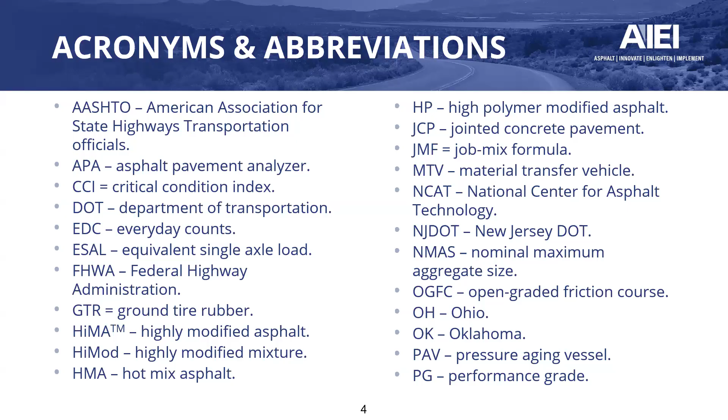We do have expected outcomes. So at the end of this webinar, we certainly hope that you'll understand how high polymer binders and mixtures are defined, specified, and used across different state DOTs. We hope you'll learn about key benefits and limitations, including cost, performance, and constructability considerations. We'll explore the results of a SWOT analysis, the strengths, weaknesses, opportunities, and threat analysis that identifies barriers to broader adoption and potential solutions. We'll review case studies highlighting how high polymer binders are being used for thin overlays, structural application, and preservation strategies. And we'll discover implementable strategies and specification requirements that agencies can adopt to ensure successful deployment.

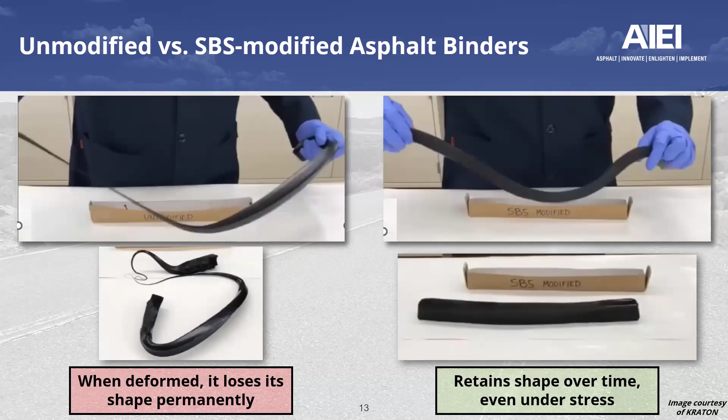Polymer modification is not new, and there's been a lot of work for over 50 years just looking at this technology and polymer modification in general.

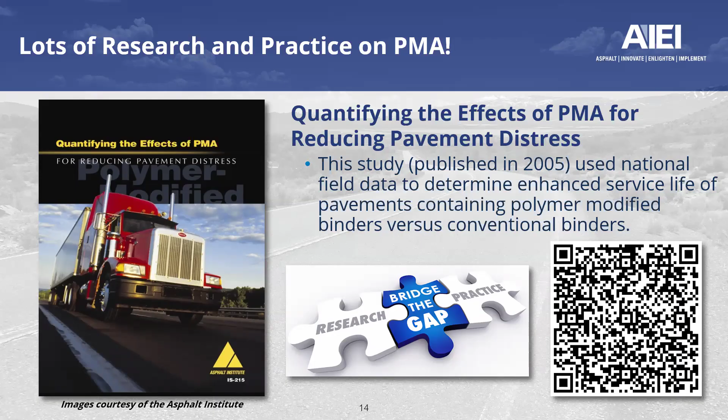I want to highlight an effort that was done by the Asphalt Institute back around 2005, entitled Quantifying the Effects of PMA for Reducing Pavement Distress. The intent was to compare the performance of neat hot mix asphalt mixtures to companion sections built with one or more layers of polymer modification. The results showed how a typical maintenance and rehabilitation schedule for unmodified pavement could be extended with the use of polymer modified asphalt, either in just the wearing course or both the wearing course and base layer. If you want to learn more about this effort, we're providing a QR code for this slide.

Also worth mentioning as part of this effort is the use of polymer modified in dense graded mixtures, and an internet survey and tools to measure return on investment. The intent of that effort was to recommend one or more tools that highway agencies can use to ensure that there will be a sufficient return on investment when using PMAs in dense graded mixtures. This was part of an effort funded by Federal Highway Administration and NAPA under cooperative agreement.

When this study was initiated back in April 2018, NAPA reported that while some states are only specifying polymer modified on highways with heavier traffic loads, other states were beginning to specify it for all dense graded mixtures. Since the latter change in specifications would usually increase initial pavement costs, it was felt that tools such as performance predictions provided by mechanistic empirical analysis, compared with life cycle cost analysis (LCCA), should be used to ensure that these increased costs will translate into better pavement performance and hence less applications of pavement preservation or rehabilitation strategy during pavement service life. The concern expressed by some industry members was that some highway agencies that have recently increased the amount of PMA being used, or were currently considering increasing it, have not used any tools to ensure that there will be sufficient return on investment.

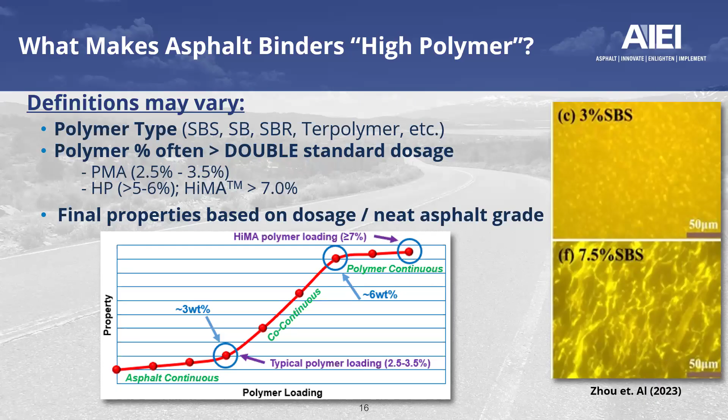All of that gets us into what we're trying to do as part of this effort. High polymer modification also is not new—it's been around for about 14, 15 years, even a little bit more. So we wanted to conduct a gap analysis on the use of this technology in binders and mixtures and try to identify critical limitations, gaps, and needs through what we call a SWOT analysis: strengths, weaknesses, opportunities, and threats. The main intention is to identify and put forth effective strategies and lessons learned by state DOTs. These are the 5 states that Tim mentioned we had the pleasure to visit with and learn from their experience. This effort also built on a previous effort completed under the Federal Highway Everyday Count Thin Overlay Pavement Solution Program, EDC6 TOPS.

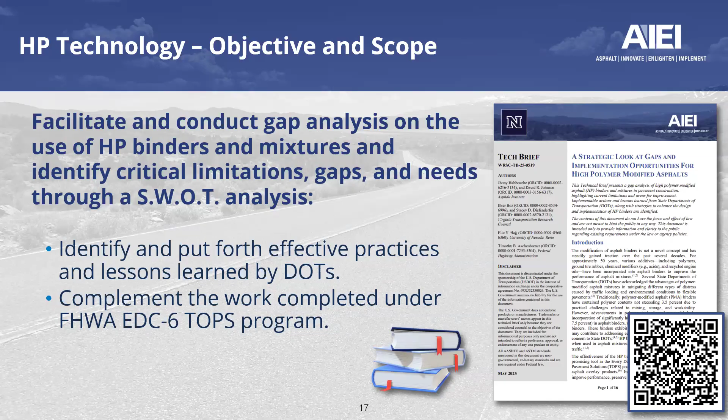High polymer modification was found to offer additional advantages in flexible pavements subjected to heavy and slow-moving traffic. When we talk about new construction, the consideration is to combat critical distresses such as fatigue cracking, rutting, shoving in asphalt, as well as top-down cracking. And in case this technology was used for rehabilitation, the consideration is to combat what we call reflective cracking.

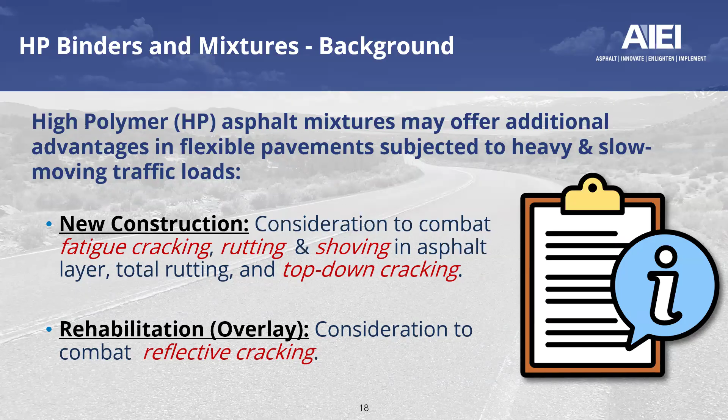Going a little bit internationally for some of the main case studies, we're starting with the Port of Napier in New Zealand in 2010. The use of HP provided a long-term solution to the frequent rutting issue they had at the port facility. This was paved in 2010, and it delivered an exceptional rutting performance, especially for heavy load traffic versus other alternative solutions that were considered.

Another great example was at the test track for the National Center for Asphalt Technology, the NCAT test track located in Auburn, Alabama. That was one of the first sections built in the United States, back in 2009. A recommendation is to use an AASHTO structural layer coefficient 70% higher when using a certain technology under the high polymer umbrella. The section was subjected to multiple cycles of traffic, and it provided an excellent performance.

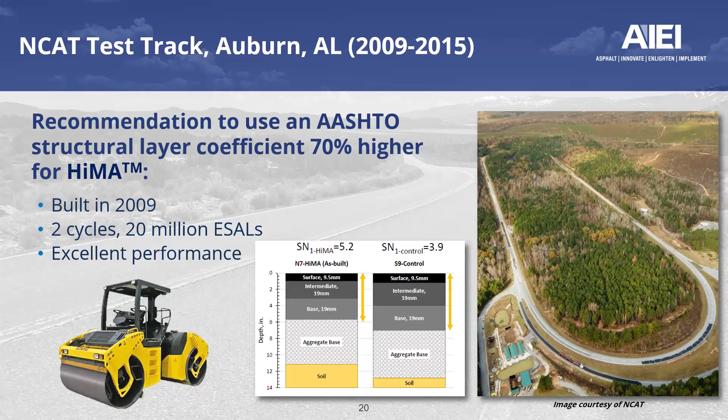If we take a look at the pavement structure here, we see that a 7-inch structure was equivalent to about a 5 3/4 inch of HP mixtures. This did not stop here. Other state DOTs expressed interest in trying to compute structural layer coefficient and do a structural assessment for their pavement when HP technology is used.

For example, Florida DOT recommendation was to use a 0.54 structural layer coefficient compared to a typical 0.44 for PMA. This was developed based on performance properties of the binder and the mixtures, using mechanistic empirical simulations and analysis, taking into consideration several critical distresses such as bottom fatigue cracking, rutting, shoving, and reflective cracking.

Also, the NCAT test track has a lot of follow-up studies and analysis between 2010 and 2015, on top of the 2009 work. They recommended structural layer coefficients up to 0.75 and 0.92 when HP mixtures are being used, compared to the 0.44 and 0.54 conventional values used for PMA, respectively. All of that was determined based on in situ strain measurements and a lot of lab fatigue performance.

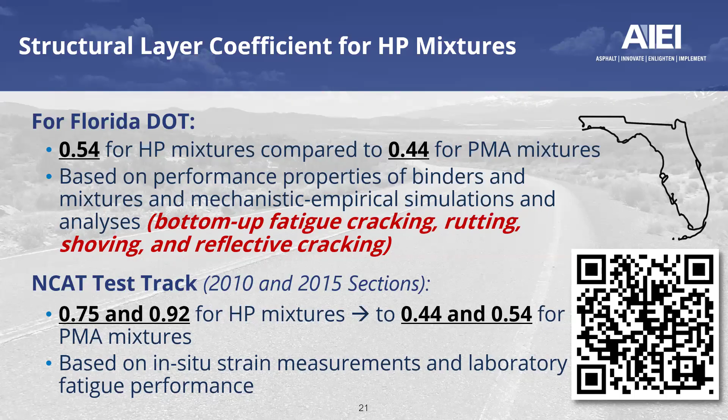Staying as well in the field, we go to New York City 1st Street in 2012. We had a high polymer thin overlay that was built over existing concrete, and it saved about 80% in cost versus removing and replacing. There is a photo that was taken and published in the TRNews in 2019, and that shows a great performance of the section.

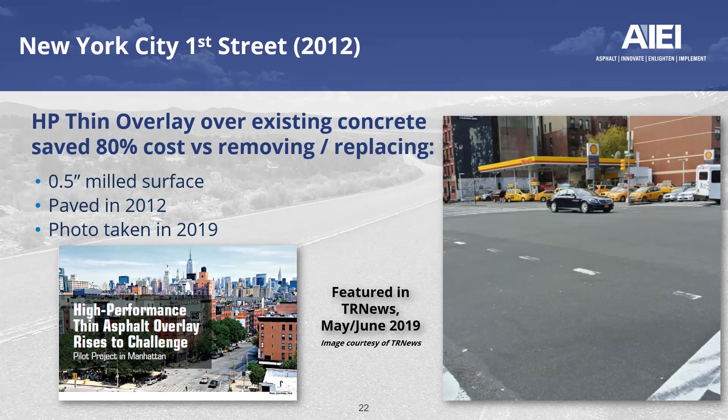Another interesting project goes into Oklahoma on the I-40 in 2012, and the use of such technology eliminated the rutting issue, and it was awarded as a perpetual pavement by conversion. Later on, as part of this presentation, we'll talk about the rich intermediate layer, the RIL, which is a type of mixture being used by Oklahoma DOT with an HP binder. That section was paved in 2012, and it shows an international roughness index of 50 even after 10 plus years.

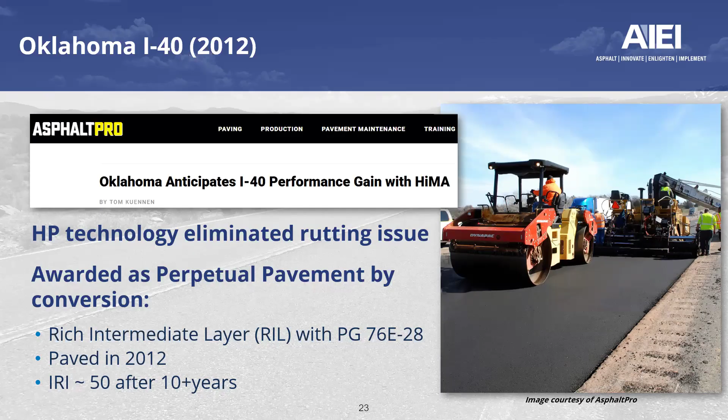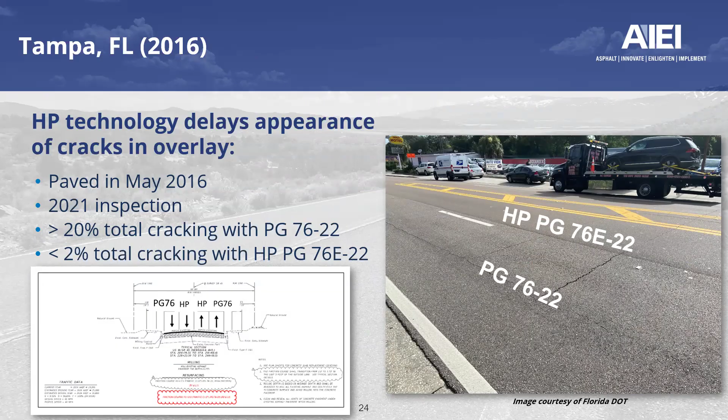Going down southeast to Tampa, Florida in 2016, the HP technology delays appearance of cracks in an overlay. It was paved in May 2016. After 2021 inspection, it was shown that there is over 20% total cracking with the conventional PMA in that lane, versus less than 2% total cracking with the lane that employed high polymer modified mixtures.

Going up to Alaska, HP offered a solution for studded tire damage. The typical binder used in that state when it's labeled HP is a PG64E-40, and it reduced rutting by almost half compared to previous alternative binders.

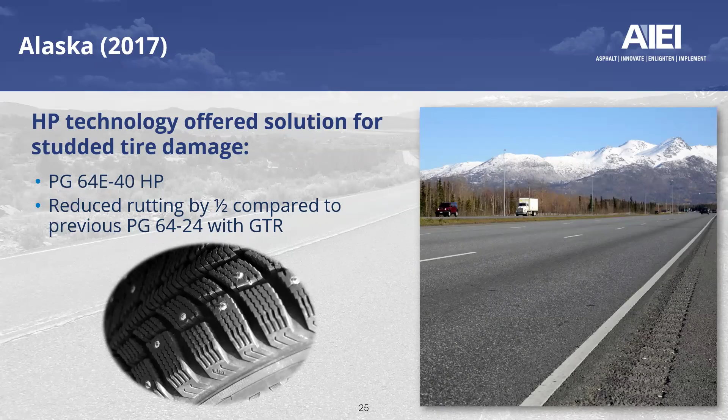Also, the use of HP was even analyzed for Florida DOT into their open graded friction course, an effort completed by the Texas Transportation Institute, TTI. It showed that the use of HP in open graded friction course can even enhance the performance of that technology by about 7 to 8 years in terms of performance life or service life. And a lot more examples are available.

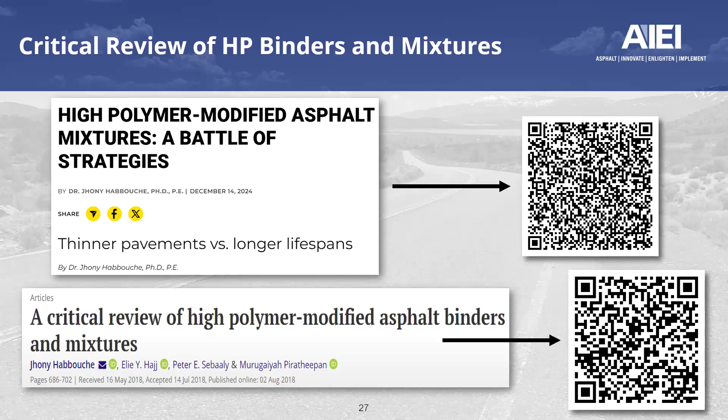If you're interested, the upper QR code will take you to a more practical, practice-oriented article summarizing these technologies and the various strategies to structurally assess them. If you're interested in learning about lab and field insight over the last 10 to 12 years, the lower QR code will take you to a great article with a critical review of such technology.

Talking about the state of the practice, back in 2021 a project was initiated to look at the state of practice of using such technology in the United States. We had about 20 states with some experience with high polymer, with the major focus more towards the eastern side of the US, primarily in the Northeast. A QR code is provided to the document with insights on how the survey was conducted and how the collected data was analyzed.

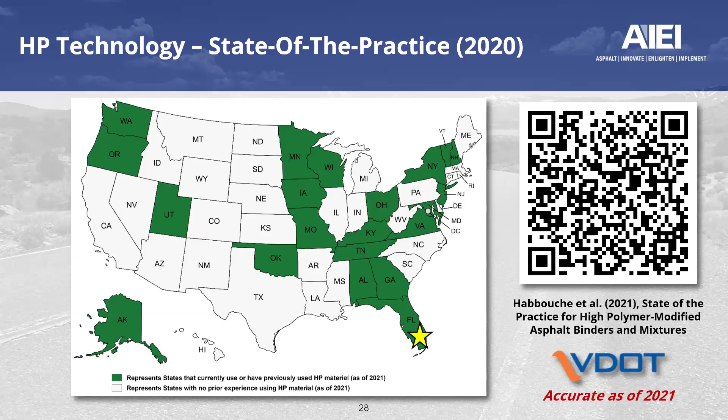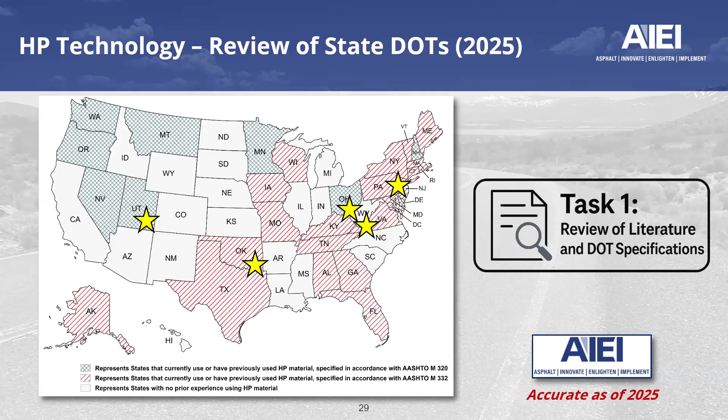Taking a brief look at the type of specification, these are from the 5 states we visited. I want to talk first about the last one, Virginia. Virginia follows M332, with a PG76E-22. They have a requirement for testing the MSCR: the non-recoverable compliance at 3.2 kPa is a maximum of 0.1 kPa⁻¹, and they have a requirement on percent recovery of a minimum 90% at 76 degrees C.

For another example, Utah uses AASHTO M320 with PG76-34. They only have a requirement on percent recovery of a minimum 90%. They do have a requirement on their Delta Tc, but as we'll notice throughout the case study, they also have requirements on the mixture, not only the binder. So the definition and acceptance of HP is not related to SBS polymer content, but is more of a performance-oriented viewpoint, related to specific binder rheology parameters and characteristics.

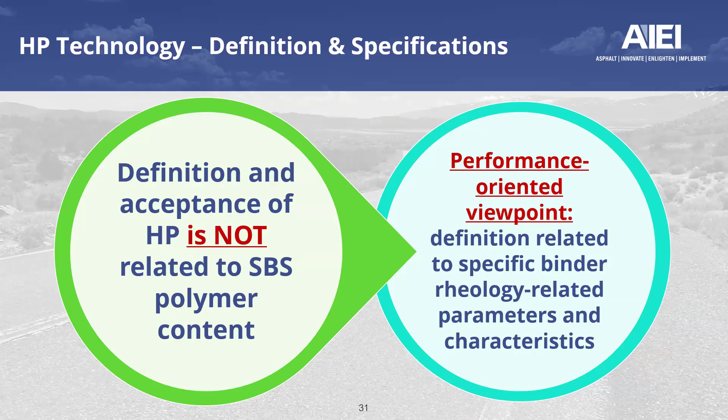Next, the second task was to develop an information gathering document. We developed about 30 questions broken into 9 modules, covering practice, usage, specification, mixture, pavement design, environmental restrictions, research, demo projects, costs, tonnage, benefits, implementation plan, and additional information. The personnel of these state DOTs were very generous with the information they provided, and were key contributors to the success of this effort.

So what we're going to do next is go through insights from these 5 virtual visits, starting with New Jersey, and then I'll hand it to my co-presenter, Dave Johnson.

All right, thank you so much, Johnny. I see that we have folks continuing to roll in. It's great to see so many people expressing interest in this.

So as Johnny rightly said, we're going to hit New Jersey first. We're going to spend a little time on these first few states, and then I'm going to make my way to Utah, no pun intended, and give more detail on that particular state, at which time I'll turn it back over to Johnny to hit Virginia and lead us through the rest of our webinar today. So New Jersey has a long history of utilizing highly modified materials.

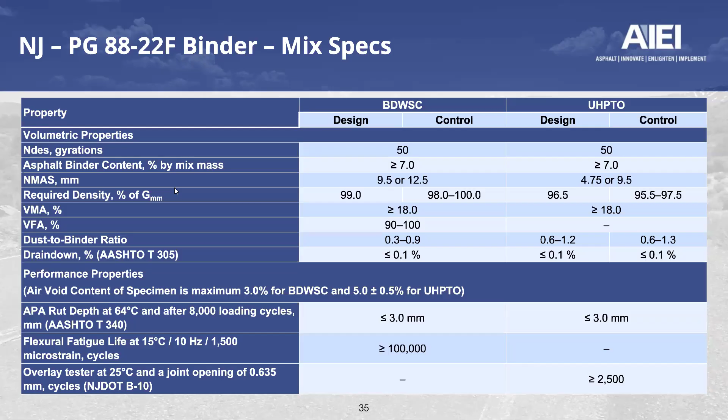So that is it for New Jersey. Let's move on to Ohio, where they as well are using these highly modified materials for bridge decks, but also at some key intersections and high stress areas.

The binder that they use is a PG 88 minus 22 modified. It's going to be pre-blended with modification, but there are no requirements placed upon their suppliers as to what kind of polymer nor a particular polymer loading. They are utilizing the PG AASHTO M320 with an elastic recovery of at least 90%. They have a separation requirement of no more than 10%, and the rotational viscosity has a relatively high, compared to most PG binders, allowance of no more than 10 Pascal seconds.

In terms of cost considerations, the size of the project certainly comes into play historically in the state of Ohio as to how much of a premium. In the case of their larger projects, it's a smaller premium of 7 to 10%. On their smaller projects, it is, as expected, a higher premium of 10 to 20%. Lots of things are coming into play as to influence that cost. The plant setup, the tonnage, and the project type are three that they noted of particular interest.

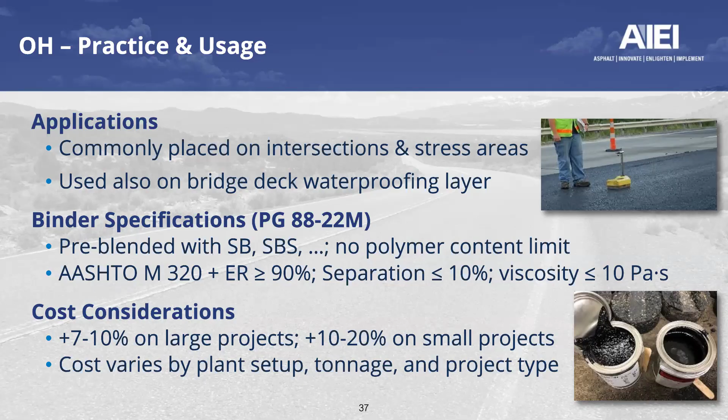Looking at the usage history, we can see that they have over a decade of usage beginning back in 2014. Fairly low tonnage for a number of years until there was a notable uptick in 2017. And as you can see, there were 10 projects, 7 bridges. 2 of the 10 projects had what they considered significant tonnage. And we, again, saw that total of over 100,000 tons.

The only other year that 100,000 tons were exceeded were just a couple of years ago in 2023. But notice that there were only 4 projects, which included only 1 bridge deck. So the tonnage totals in 17 and 23 were somewhat similar, but the number of projects to produce that tonnage were notably different, and the distribution of those types of projects was also seen to have been different.

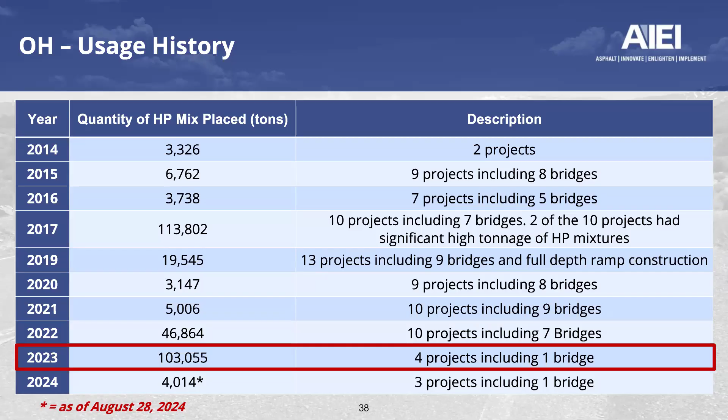In terms of the job mix criteria in Ohio, they also have a minimum binder content, also very high, in their case of 7.25%. Gyrations are at design at 50, with an Nmax of 75. The design air voids is 1.5%. The VMA on their mixes is 15.5.

They do have a permeability requirement, which in bridge decks is very common — we want to have that low permeability. Rutting is a maximum of 4 millimeters, and we can see that they are also using the APA, with requirements at 64 degrees C.

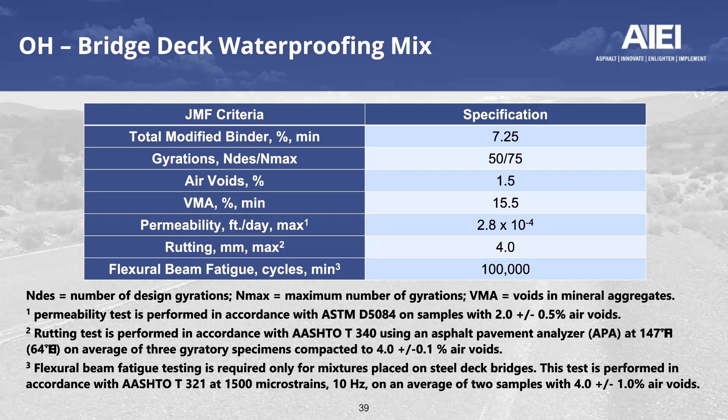They also have a flexural beam requirement, which is identical to what we saw in New Jersey: 100,000 cycles at 1,500 microstrains, with the specimens designed and built to 4% plus or minus 1% air voids. There is research going on in the state of Ohio

that looked at how much of a performance boost we see with these mixtures compared to other options, the conventional binders. They found it was about a 25% increase in life. So about 25% over their normal of 12 years would mean they're getting about 15 years or more out of these sections.

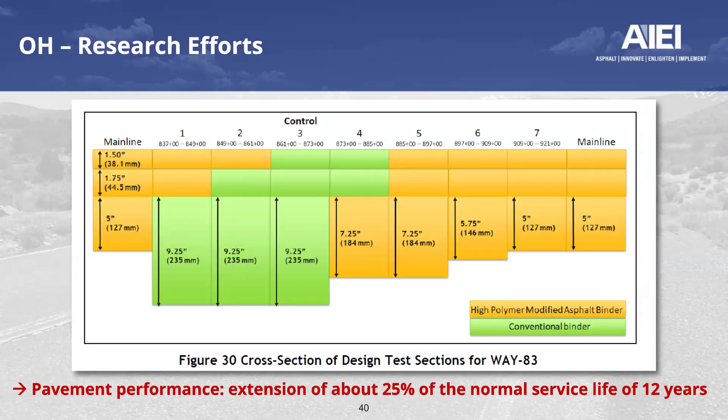Moving on to yet another O state, this time Oklahoma, where they are using these, as Johnny already mentioned, commonly as a rich intermediate layer in very high strain environments. What they are looking to address is reflective cracking.

They believe that the solution they're finding success with is this very rich, fine mixture designed to low air voids with a high binder content. They find that this is a lower cost than a thick structural layer or the utilization of geotextiles plus a leveling course.

But the cost increase is a little bit more than what we saw elsewhere — in this case, about a 21 to 31% cost increase. So they are definitely paying a premium for them, but the return on investment is being seen in the performance.

In terms of mix design, again a 50 gyration mixture, keeping the binder content not quite as high — they have a minimum of 5.5% on their 9.5 millimeter mixes. They are designing to a 3% air void at percentage of GMM. Their VMA is 15.5, as we saw in Ohio as well. VFA is 73 to 79.

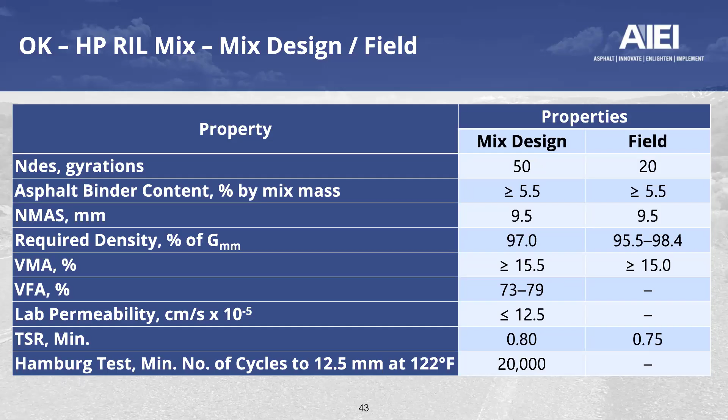It's interesting — they also are doing a TSR. This is the first state we've seen that is looking at that, and they have an 80% requirement. They, as well as others, are utilizing the Hamburg, using their standard 50 degrees C, 122 Fahrenheit, and a minimum of 20,000 cycles, with 12.5 millimeters of rut.

The cost increase is strictly in cost dollars per ton. Recognize that they are looking at their mixtures from a unit cost. Some of our states pay for binders separately; some pay for the mix as a unit of aggregate as well as binder, which is consistent with what Oklahoma is doing.

And we've noticed there was a trending upward in terms of cost, with a peak of the values available to us in 2022 of a little over $165 a ton. There was a reduction of almost $9 a ton seen in 2023. But notice that the approximate difference in price has continued to climb for most years, with a most recent premium of about $30 per ton above their conventional polymer modified mixes.

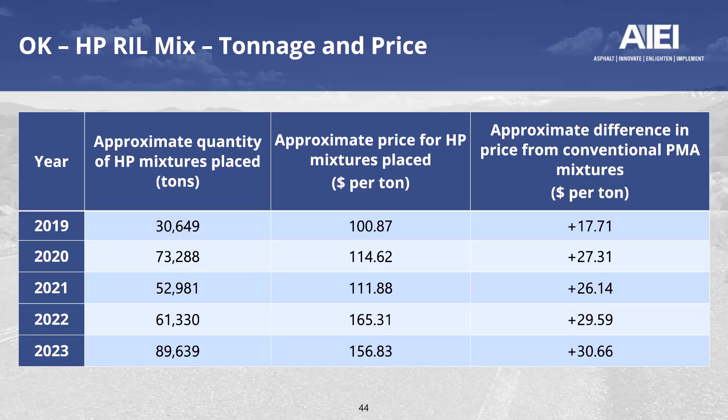We're going to spend a significantly greater amount of time in Utah. Utah has really pioneered a unique mixture that is gaining a lot of attention both stateside and internationally. The work done there — Mr. Howard Anderson, who was recently promoted to statewide materials engineer, is the individual who deserves significant credit for this, as well as others on his team, and the industry. There's a very good synergy between the contracting community and the DOT in Utah, in no small part because of the relationship that the Utah Asphalt Pavement Association helps to foster.

Utah is a Hamburg state. They were one of the lead states way back when the Hamburg was first introduced in the United States, and they continue to utilize it. They did a lot of their investigative work at the laboratory with the Hamburg device, making samples of various asphalt contents, typical Superpave mixes designed to a typical 4% air void value.

They were running the Hamburg test initially at their standard temperature of 50 degrees C for 20,000 passes, then would increase the load on each of the wheels and run an additional 20,000 passes. After a full 40,000 passes, they would allow no more than 10 millimeters of rutting, which is their standard maximum for mixtures at 20,000 passes, 50 degrees C, and standard loading weights.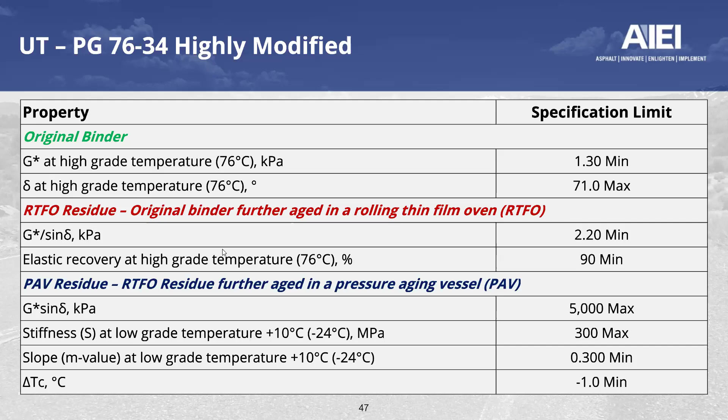Howard is always doing a great job of trying to provide a visual for folks of what exactly some of these engineering parameters might relate to. In terms of what is a kilopascal, he went through the calculations and found that approximately 11 dimes equals approximately 1 kilopascal. So he had the folks in his lab create some cups.

You can see that they were placed at room temperature, which is consistently somewhere around 72 to 74 degrees Fahrenheit. Over time, in fact over 14 days, they simply let that material set. They did time-lapse photography. We can see the initial photograph on the left and the final photograph after nearly 14 days on the right. Notice the differences between these materials.

When we look at the far left material, that is a neat asphalt, a 58-28. We have progressively higher polymer loadings for the 64-34, the 70-28, and finally the highest polymer loading in the 76-34. Notice that after 14 days, the evidence of the dimes is at best minimal. You may be able to look real close and find a dimple on the surface of that 58-28, but essentially it swallowed it up.

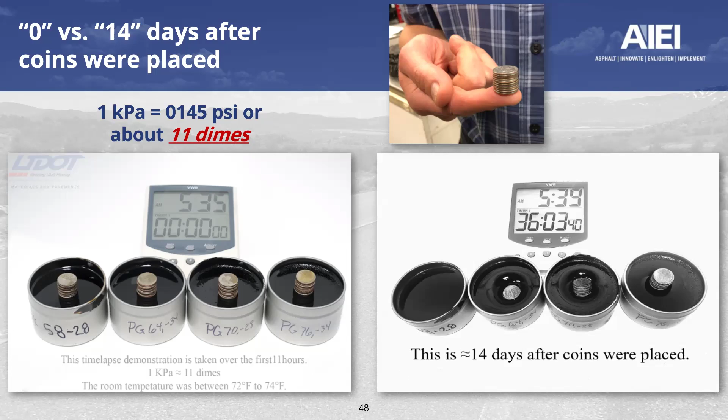The typical polymer loadings, both of these are about a 3.5% or so polymer loading. We can see that the dimes over time, 14 days once more at room temperature, slowly made their way in, but they're still visible. Very impressively, the 76-34 after 14 days, while it has deformed slightly, it is very minimal by comparison.

So armed with all of this information, Howard was able to get approval with the higher ups at the Utah DOT to establish a field trial. The regional materials engineer for Region 2 in the state of Utah was entrusted with the selection of the location, and he picked what he deemed to be the most challenging location within Region 2.

For those who aren't familiar with the state of Utah and their regions, think of the Salt Lake City area and move east and west across the state, and that is Region 2. If you move across to the west, you'll find the port of entry on the Nevada border at Wendover on Interstate 80.

While the average daily traffic at that location isn't exceptionally high, a little under 8,000 vehicles per day, it is a very major truck route with over half of the traffic stream actually being heavy commercial vehicles. When you equate that to equivalent single axle loads, you'll find that it's north of 2 million per year.

This is a very warm location within the state. If you were to run the typical software at a 98% reliability, you would see that a PG 64 minus 28 would be the recommendation from that software. So in the case of the 7634, we're stretching the boundary on both the upper and the lower end.

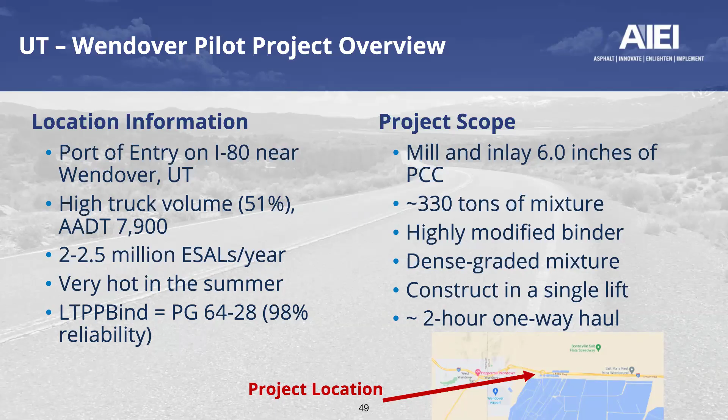Utah's mix design requirements now incorporate both a 12.5 and a 9.5, the half-inch and the 3/8 mixes. They are also designing to 50 gyrations. The target air void is plus or minus a quarter, surrounded by that 1%, so 3/4 to 1.25% is the range that they allow. The VMA, dependent upon whether it's a half or a 3/8 mix, have high values as well. What's very noteworthy is the voids filled with asphalt are high, in the low 90s.

The dust range, as we can see, is a fairly typical range. And despite the fact that they were once running 40,000 cycles at higher weight, they then shifted to 40,000 cycles: 20,000 cycles at the standard weight with 50 degrees C and an additional 20,000 with the bath temperature increased to 54. Again, at the standard weight, that 10 millimeter max requirement.

Because of the results they've seen thus far, the decision was made about 2 years ago to only do 20,000 cycles at the higher temperature of 54 degrees, maintaining that maximum of 10 millimeters. To date, whether it was 40,000 or 20,000, there has not been a mix that has had a problem.

Much like we saw in the state of New Jersey, Utah also requires a drain down test on this dense graded mix. Again, that is to ensure that with this rich mix, we don't have an experience of bleeding at those higher temperatures and during production. Thus far, we haven't had an issue with any of the mixtures in Utah with that parameter.

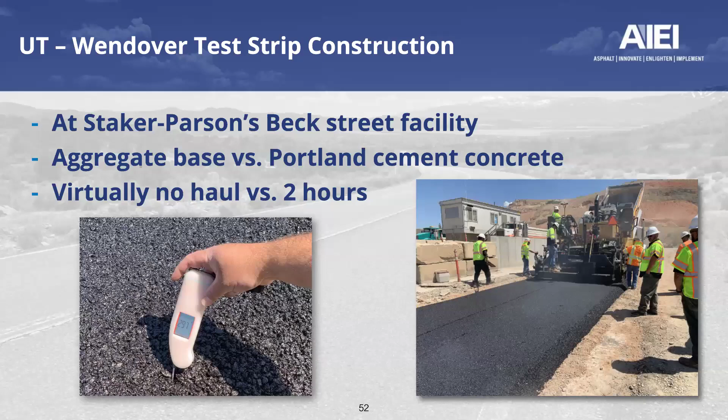The conduction of that test strip went without a hitch in terms of getting density. They did run into some issues of feeding. As you may suspect, the amount of tonnage you need to provide to the paver when laying a 12-foot wide mix going down at 7.5 inches uncompacted is very noteworthy.

So if you are considering doing thick lift paving, much like Utah is doing in this case, or the state of South Carolina and some others have done, you need to have your trucking on its A game. The problems that, as we'll see at Wendover, can arise if you have a hiccup in that trucking can be notable. So they recognized that they needed to make sure that when they went out to Wendover the next day, the trucking was on its A game.

What did we see at this test strip? Well, first and foremost, the target density in Utah is 96%. They were getting densities of 97+%, using regular rolling equipment. They did notice, as we saw in that one picture, that feeding material was a challenge to get enough material on site, even though in this case it was a zero haul situation. They definitely created a great plan for that next day.

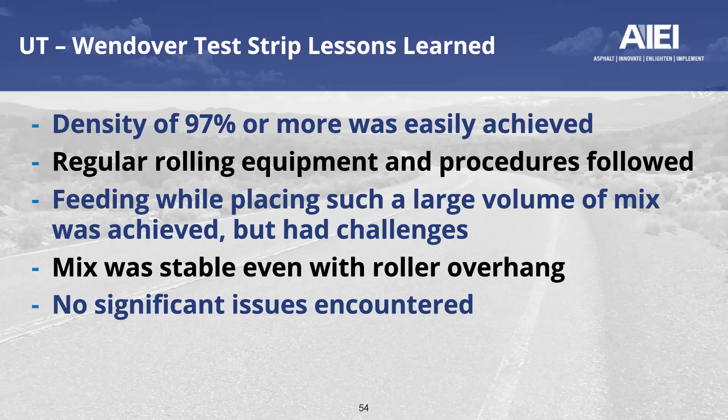What was most surprising to me about this test strip was the fact that you had unsupported edges. It was laid down at 7.5 inches loose, compacted down to 6. I truly expected this material to walk out some under the rollers, and it virtually did not. There was incredible stability with a double drum vibratory roller hanging over the edge about 4 to 6 inches, without that material showing any sloughing, even under vibration. So no significant issues were encountered in terms of densification.

So we go out to Wendover that next day. This is a shot taken from a catwalk at the interstate between the way stations on either side of the highway, in the east and west direction. In this case, we are actually looking to the west into the state of Nevada.

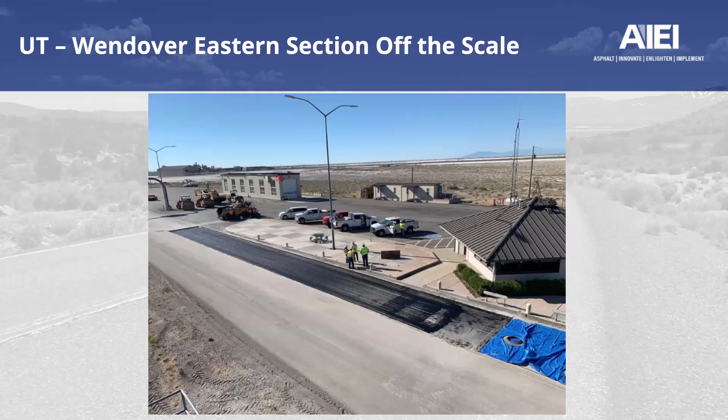You can see that they placed a tack coat. I won't bother to criticize that tack coat any more than what I just did there. This is looking east of the scale. And here's a couple of pictures from construction.

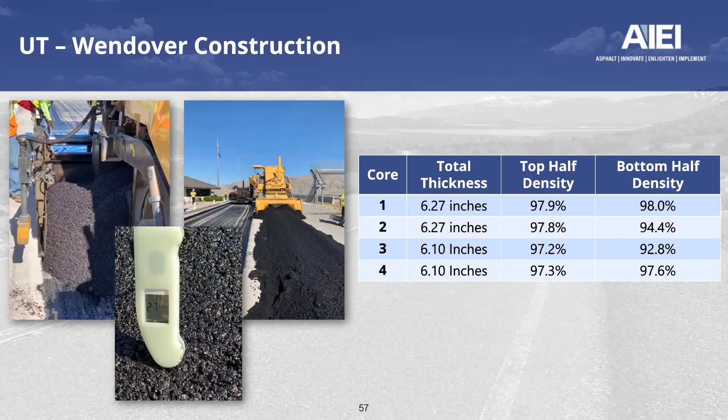What have we seen in terms of performance? We continue to call this early performance, but in June we will hit the 5-year mark. Successful construction, even with that 2-hour one-way haul, was achieved. The densities—the DOT was holding the contractor to their PWL spec only on the top half of those cores—achieved great density above 97%, almost 98%. After approximately 5 million trucks, and we'll be getting 6 million before this summer is over, there's no discernible movement, no cracking, zero distress of any sort. This site has been performing very admirably.

A question comes up about skid numbers. This, again, is 100% crushed material. While it is a fine 12.5 millimeter gradation, the skid numbers themselves are very good.

There was a second site where they relatively quickly decided to try this mixture out. Staker Parsons once more was the contractor at this location, north of Salt Lake City, fairly close to the Beck Street plant I've mentioned where the mixture is being produced. They were originally planning on removing and replacing the concrete with additional concrete, but the decision was made to ask: what if we were to simply overlay it with this material? Would we get good performance without having to go through the time and expense of removing and replacing that concrete?

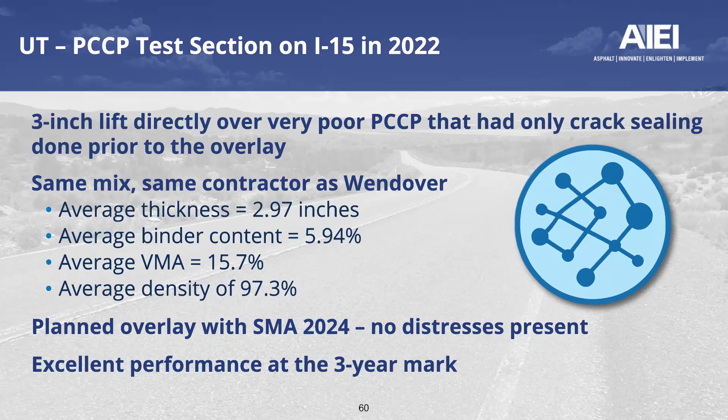There was a planned overlay which they executed roughly 1.5 to almost 2 years into the trafficking of this location. They did overlay it with an SMA. At that time, there was absolutely no distress—fantastic performance, even though we can no longer see the highly modified materials. If and when reflective cracking shows up, we'll definitely be reporting that in future presentations.

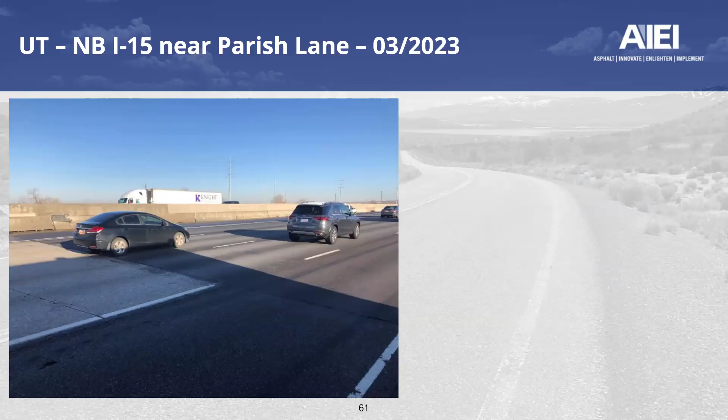So here are some slides, pictures of that location. This is the start of the I-15 overlay. You can see just behind these vehicles, that's the existing concrete that was overlaid. They did mill the start and stop at that location for a good tie-in.

Just some additional photographs—these are all roughly 1 year following construction. So as mentioned, after a couple of years, there was no notable distress.

We did acquire some of the Utah mix, again from the Beck Street facility, utilizing a proven 64-34 Superpave mix and comparing that in beam fatigue to the highly modified option at low air voids. In the boxed examples, we're looking at equivalent microstrain requirements of 475, 525, and a peak of 600. In every single instance, not too terribly surprising to myself, the difference in number of cycles to failure is somewhere between 50 times to a little over 70 times. In the case of the 600 microstrains, it was 72 times more cycles—almost 914,000 cycles compared to just a little over 12,000 for a very good Superpave mix.

So the upshot is that in the beam fatigue arrangement, the performance of the high mod system is exceptional.

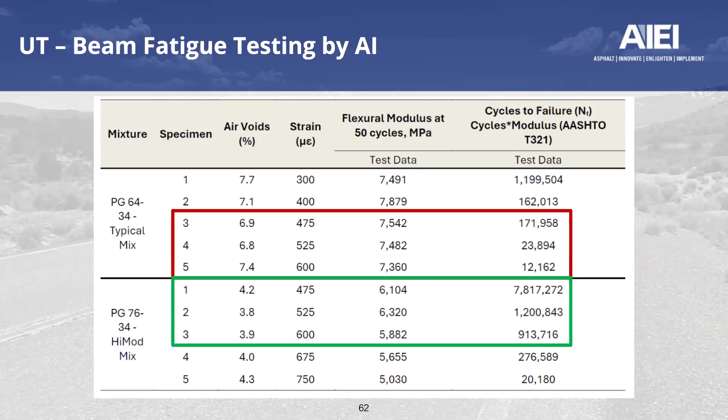Another project in the midst of construction. There's an interstate beltway around the Wasatch Valley, just south of the international airport at Salt Lake City, and that's where this project is located, on I-215.

The original plan was to remove and replace the existing PCC. The decision was made to do an alternate design, rubbleizing the PCC in place and overlaying it with 5.5 inches of the highly modified material in two lifts: a 1.5-inch leveling course on top of the rubbleized material, then a final lift of 4 inches.

The cost savings were roughly $40 million compared to the removal and replacement option. UDOT maintained the budget but extended the scope, adding 17 miles of ramp work. Granite Construction was awarded this $111 million project.

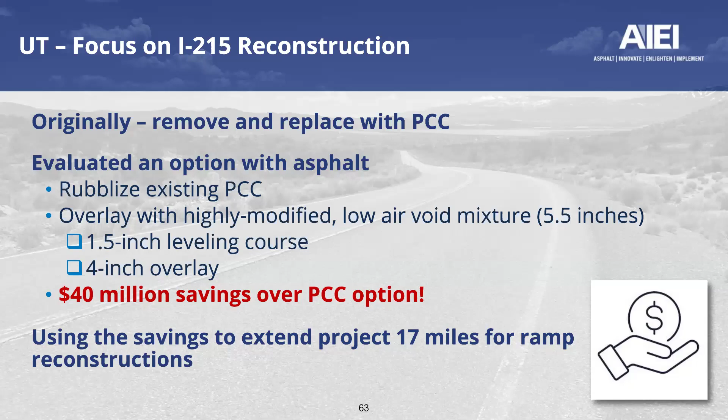They've just wrapped up the rubbleization in one direction and will continue with the overlay, finishing in the next couple of weeks, at which time they'll switch to the other direction and begin the rubbleization process there. A very unique project in terms of the cost savings comparison between the two options.

What have we learned in the state of Utah? Densities have not been a problem almost exclusively. I have density data for 42 projects now. Of those, only one has not achieved the target of 96% density, and that project still achieved 95.7%, a very high density by conventional comparisons.

Regular rolling equipment and procedures have been followed. Out at Wendover, as well as at the test strip, Staker Parsons found that with just 5 passes of the double vibratory roller they were getting all the density they need. So they did not include an intermediate roller rolling phase at either the test strip or Wendover. The final roll was done with that same steel roller operating in static mode to create the final smooth surface.

96-plus percent density has been commonly achieved, and roller patterns have been pretty consistent across the state. Not everybody follows that exact pattern, but the state has used lifts as thin as 1.5 inches to greater than 6 inches compacted thickness in one lift, and density requirements have been easily met almost exclusively.

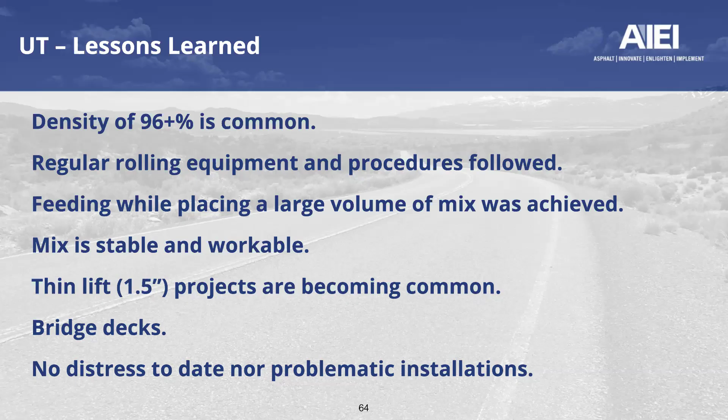Some other facts: in 2024 this material really took off in Utah. They put out over 500,000 tons in terms of bid that year, and contractors were really pushing for this as well. In 2025, in Region 2, the Salt Lake City region, fully 70-plus percent of their mixtures were these highly modified, low air void mixes.

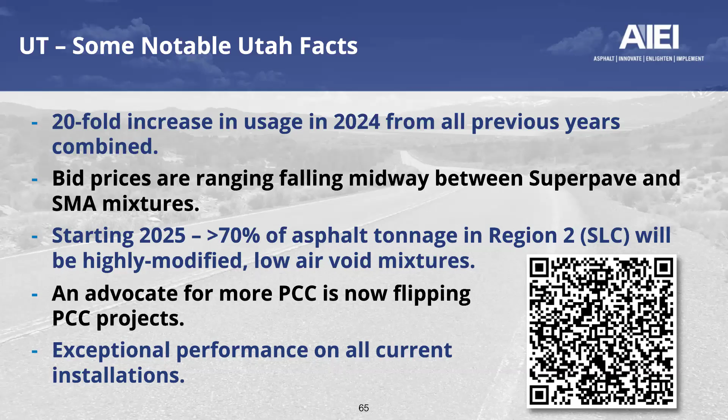The one-time main advocate for additional Portland cement concrete turns out to have been the regional materials engineer in Region 2, who picked the Wendover location. He's now retired, but in the last year and a half of his career it was notable that he, once a promoter of more concrete, was now switching concrete projects to this technology. Exceptional performance throughout.

In terms of cost, Howard Anderson kindly provided cost data comparing typical hot mix asphalt, specifically a Superpave 6434 SMA, once the dominant mixture for high stress locations in Utah, against the highly modified material. In 2023, the cost of the high mod was actually less than the 6434, partly because most high mod projects had relatively short haul distances, while Superpave incurred additional haul cost. That isn't directly reflective of the material itself, but since we couldn't filter it out, we see raw numbers of 125 and 117 per ton respectively.

In 2024, high mod, as expected, was slightly more expensive per ton than the Superpave. And then a really interesting thing happened in 2025.

SMA was once the most dominant hot mix in terms of tonnage in the state of Utah. In 2025, as you can see, no SMA went down. There will be some SMA that goes down this year in 2026, but it's not going to be exceptionally large tonnage. The reality is that SMA has become almost an afterthought in Utah because of the high performance of the highly modified material, as well as the embracing of this material by the contracting community.

You'll also notice in 2025, I show two different prices per ton for this mix. That's because there was one project mixed in the Salt Lake area that had as much as a 6-hour one-way haul to the Four Corners area in extreme southeastern Utah. The two costs we see there, 140.31 per ton, is all of your highway mixes. The 138.77 is with that additional haul length project, which was over 200,000 tons being filtered out. So almost a buck and a half savings per ton because of that exceptionally long haul and large tonnage project. That equates to about an 11.3% difference in cost between Superpave, filtering out that long haul project, and the high mod material in 2025.

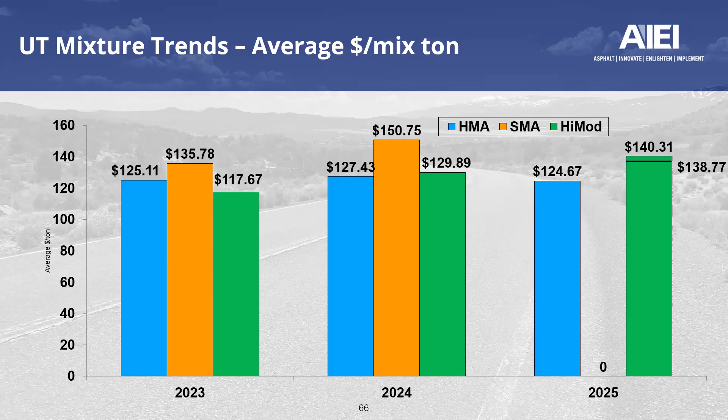Where has it been used? Well, kind of everywhere in Utah. It has become the dominant mix. I mentioned over 500,000 tons were contracted in 2024. Last year they placed a little over 600,000 tons, and we're seeing it in thick lifts as thick as 7 inches compacted. We're seeing it in very high traffic areas - Wendover is the shining example of that at the truck weigh station, certainly a high stress location. We've seen it in thin lifts too, including 1.5 inches on top of bridge decks.

We have overlaid both rubblized and unprepared PCC on I-15 and 215 respectively. It has been used in truck climbing lanes on the interstate as well as U.S. highways in some of the steeper mountainous areas where they've really struggled to keep an asphalt mixture long term. They have high traffic intersections, including one coming from a mine in the mountains in a downhill configuration to a stoplight, where the loaded mining trucks have to come to a stop. As you might imagine, that has been very problematic as well.

And they're even using this on low volume roads. Utah had once embraced SMAs, including on low volume roads. So I mentioned how they used them in their high stress locations, but it's not exclusive, as they used it in low volume roads in their southernmost region as well.

This technology is certainly catching the attention of other Western states as well as outside of the Rocky Mountain region. I have sent this specification as far away as New Zealand - that's the Utah spec. In Montana, we laid our first trial in Bozeman, Montana on North 19th. Those of you familiar with Bozeman know that's the interstate exit that services Montana State University. It was about 19,000 tons.

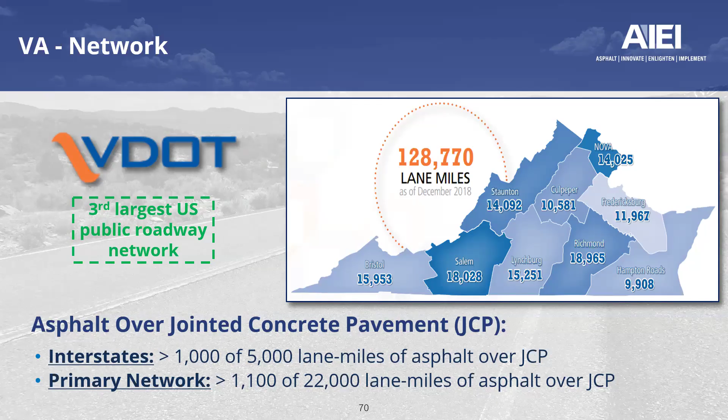The first project was actually in 2014, in a rural area, a subdivision, just for trial purposes. In most cases, the use of HP was not really intended to mitigate cracking in general, reflective cracking in particular. But then after that, starting in 2015, you see that technology was employed on a lot of interstates.

In this table, we're computing the various routes and sections where HP was used to mitigate reflective cracking, except one where we had a bituminous material on top of an existing asphalt. These are not all projects that VDOT has constructed. This list is as of 2018. I would assume double of these on top of these — there were about double of these sections constructed between 2019 and 2025.

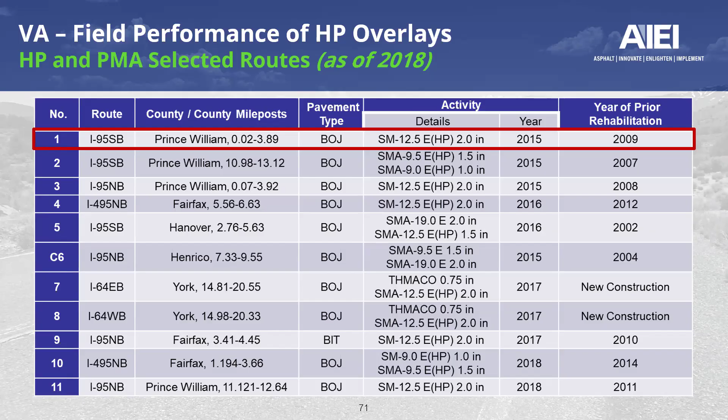Taking you through a brief example, on I-95 southbound in Prince William, you will see that was a 2-inch dense graded surface mix, a 12.5-millimeter mix constructed on top of a jointed concrete pavement. That was constructed in 2015, and the year prior, in terms of rehabilitation, was 2009. So through the pavement management system...

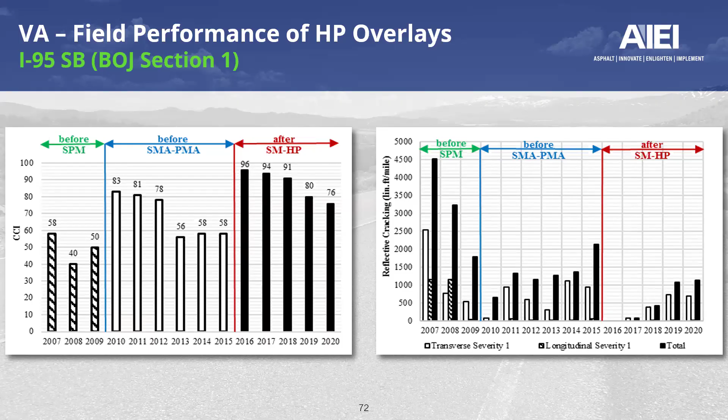I want to put a caution here. While these numbers might look much lower compared to typical numbers we see on overlay, remember that these are 1.5 inch or 2 inch overlays on top of jointed concrete pavement that was not necessarily treated to the best prior to construction. So all of this will factor in. And if we go with the rule of thumb of reflective cracking of about 1 inch per year, I assume these numbers are pretty high compared to what we typically see with reflective cracking on conventional overlays on top of jointed concrete pavements.

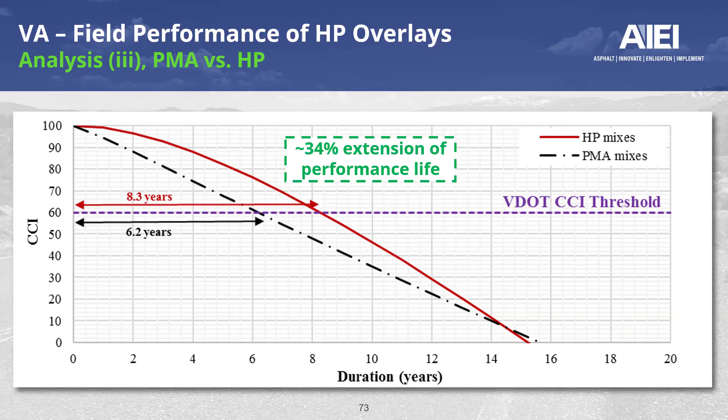Some general lessons learned and effective practices, from Virginia DOT as well as contractors: they recommend consulting with suppliers regarding any handling instructions, especially your polymer supplier. When we visited with contractors, they reported a recommended storage time of 3 days or 3 nights. In that case, contractors should have some backup options for HP binders, maybe a blend-down option, in case you had weather restrictions or breakdowns of machinery that delayed you from executing the job.

Also, according to the contractors, wax-like products typically used to reduce binder viscosity are not recommended. They also recommended the use of a material transfer vehicle, MTV, to help establish continuous paving, leading to higher quality and a smoother mat. And VDOT personnel, as well as contractors, recommended checking the quality of HP binder upon delivery and even during production, by sampling and doing extra testing at a frequency slightly higher than the typical frequency for conventional jobs.

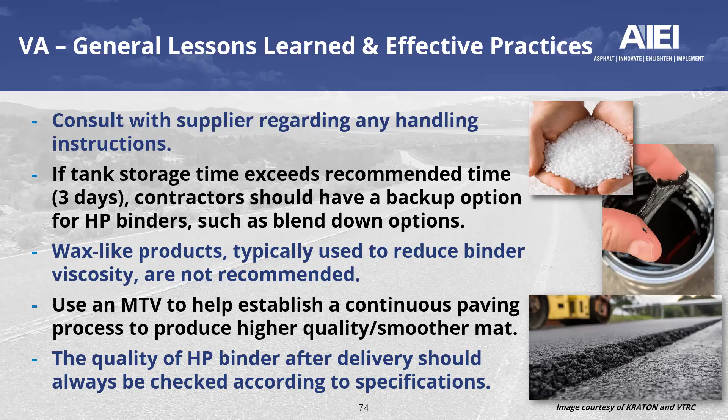There is a lot of effort and information for Virginia. This QR code will take you to a study completed around the 2021-2022 timeframe that has all that data together. If you check your chat, our moderators provided links to memorandums for our virtual visits with the 5 state DOTs. If you click on these links, you can download about a 15, 17-page PDF that summarizes all the information we compiled, but for the sake of time, we had to provide a summary in this webinar.

Now we're going to move to the last part, which is the strengths, weakness, opportunities, and threats, the SWOT analysis. You'll see a QR code here as well as a link to our technical brief that has the details of this analysis. You can access that by checking your chat, and you will have access to that link.

Starting with the strengths, these were divided into 2 categories: people versus HP technology. When it comes to people, we talked about the support from Federal Highway Pavement and Materials Program, assessing and deploying this technology, assessing the effectiveness and readiness of this technology, as well as looking at the barriers. All aspects of that technology are a clear example of the support of Federal Highway, and this cooperative agreement is a clear example of that. State DOTs show a lot of interest. We took a look at that map between 2021 and 2025 and saw an increase in the number of states experimenting with this technology, as well as the industry and research community. There's been a lot of work documented, whether in the lab or field, about this technology and the enhancement in material properties, as well as performance characteristics, and major support from industry.

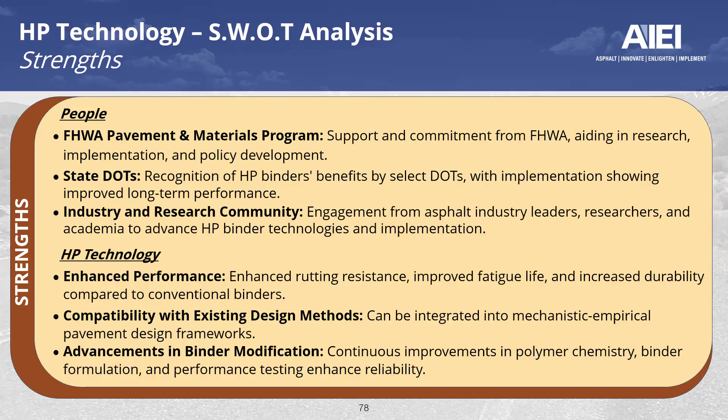Talking about HP technology, a lot of work exists in the literature about enhancement and performance. We've noticed that the use of that technology did not require a new design method or machinery. It's compatible with whatever is existing and used in day-to-day practice. Every day there's advancement in binder modification, which helps the high polymer technology positively. It's always great to highlight weaknesses and try to turn them back into strengths.

These weaknesses were divided into people and technology itself. Under the people's umbrella, there's variability in expertise. For example, the experience in the state of Utah is totally different from the experience in a different state, and that's expected.

There are limited contractor familiarities, especially in states that are just starting to experience the HP technology. This may require some training and other educational opportunities, such as this webinar and the documents published under this project and by other organizations, so they don't have to start from scratch and can familiarize themselves with the technology.

When we talk about the technology itself, the primary and very interesting factor is the lack of standardized definition. I have a slide with specifications from 5 state DOTs that we visited, and you'll notice these specifications are totally different. So how do we define a high polymer? That remains a very important question.

Higher initial cost is another factor. Dave alluded to that, case by case, state by state. I'm going to show a summary table in a couple slides. Even though this is a weakness, a lot of state DOTs were able to justify an extension in performance life that justified the higher initial cost. So we're looking more at a benefit-cost ratio rather than just a cost assessment.

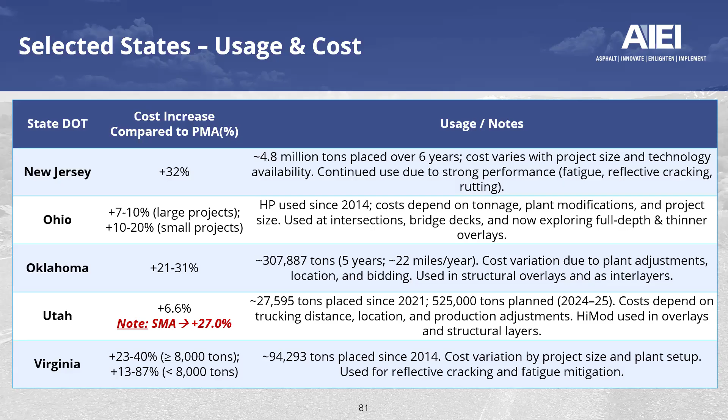Some opportunities, again, federal and state funding support. This project is a clear example of that. Growing demand for high performing pavements. We have a growing amount of load in this world, as well as the magnitude of that load, so all we need is better and higher performing pavements.

We do have a lot of advancement in testing and characterization that can shed light on the improvement that this technology may bring. Collaboration and knowledge sharing.

This is a great example here, for example the webinar collaboration. Dave highlighted in detail that synergy between the state DOTs, the contractor, supplier, and so on for the success of the various projects, for example conducted in Utah and even the remaining states that we visited with.

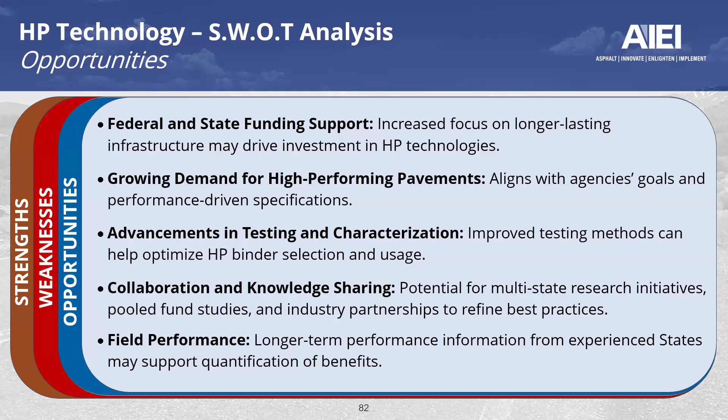And then field performance. Some of these states we just saw, for example the Commonwealth of Virginia, Virginia DOT, with the data there, it shows that it's working in the field, enough data, and then there is that extension in performance life.

Finally, looking at the threats, supply chain and material availability remain a threat for this technology and any other technology. Budget constraints, and that's the case in many of the states. They'll tell you, I don't have the budget for that initial cost, and I'd rather invest that money into conventional technologies that I'm conducting, and then pave as many routes or lane miles as I can.

Workforce training needs. You want to make sure that if you haven't dealt with that material, you get a bit of training, or at least familiarize yourself with the material before going big into a project. And then state priorities. It could be as simple as, for a given state, this is not a priority at the moment for this technology or any other technology.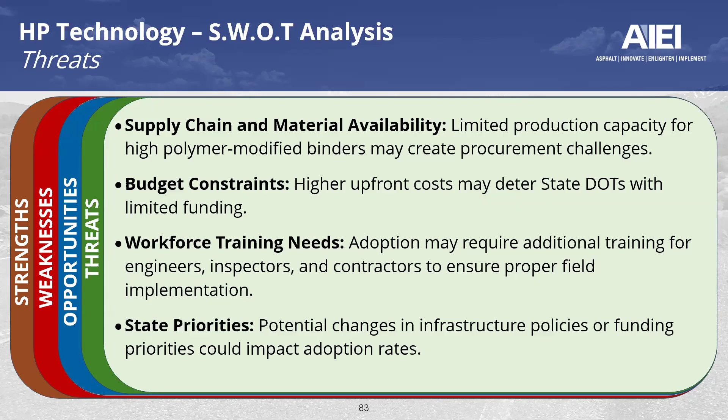Now the hope is to turn the threats into opportunities. Finally, looking at the key strategies for implementing HP mixes. First of all, it's a performance-based approach. And I had that in an earlier slide, that it's not defined based on polymer content, but it's more performance-oriented.

Binder spec supports innovation, cost-effective sourcing. It's application-specific use. We've taken you through various case studies in the five states that we elaborated on, and you've noticed that technology was used for various purposes to address various key distresses. It was an application-specific use.

The intention here is to use it to extend performance life, and not as a substitute for poor structural design or maintenance. Cost-benefit evaluation. Again, we've seen initial higher cost, but we were able to justify an extension of performance life. So look more at the cost-benefit evaluation and not the cost component by itself.

And finally, feedback loop. A simple example was Utah. They had a given experience, they took a step back, assessed all the data compiled back in the days, made enhancement improvements, came out with the high mod spec, looped it back, redeployed it, and got positive results. So always integrate lab testing, field data, and spec updates for continuous improvement.

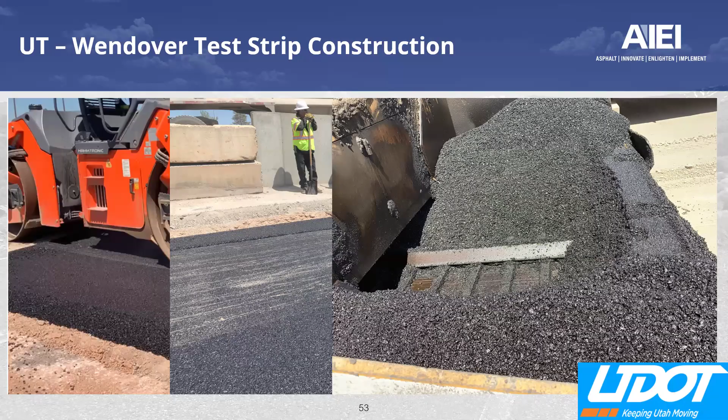Very good, see we've covered the tarping question. If we go back to slide 50, here we're looking at the mix design. Has anyone used the high polymer mixture without 100% manufactured aggregates?

I can say that some states investigating emulation of the Utah system have done some work with allowance of small percentages of sand, less than 15% I think is about the maximum. There has been some difficulty with their rutting apparatus, whether it be Hamburg or APA, when they allow the sand. There's a Midwestern state, for example, I won't say which one, that allowed sand and was struggling to meet the Hamburg requirement. They eliminated the sand, and the issues went away. So it's entirely possible you may be able to do that, but I would rely upon the rutting tests to determine whether we have confidence in field performance. You're buying a premium mixture here, so let's be careful not to compromise it, even with a small amount of sand.

Very good. Next up is a comment related to cooling.

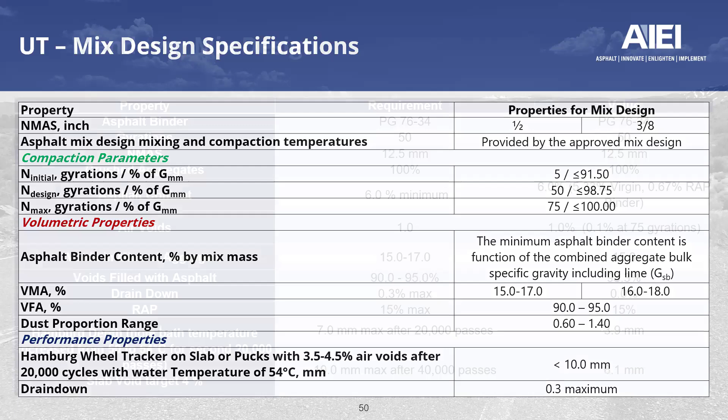You may have your own comment you want to add as well, but it takes time to cool down even after paving, though it becomes really hard after cooling down. That's why I think the haul time was relatively okay. So I don't know if you want to add any of your experience based on that comment.

Yeah, these mixtures—one thing we didn't talk about with thick lift is that you need to be on your A game when it comes to paver operations. Any little mistake you make is going to be accentuated in a degradation of the ride. Therefore, the need to do post-construction grinding to achieve smoothness, especially with thick lift paving, can become an issue.

The milling contractors in Utah report that milling of these highly modified materials is very similar to what they've experienced when milling concrete. They're going through teeth a little bit faster, and it's a slightly greater cost per unit to mill this material. It does become very hard, as was stated—certainly not as hard as concrete, but definitely more so than typical asphalt.

Okay, next question about MTVs. I think you mentioned previously, but a side question came in terms of windrow paving—would you be able to do windrow paving with this? We did in Montana. And Utah does windrow paving, but they run it through an MTV.

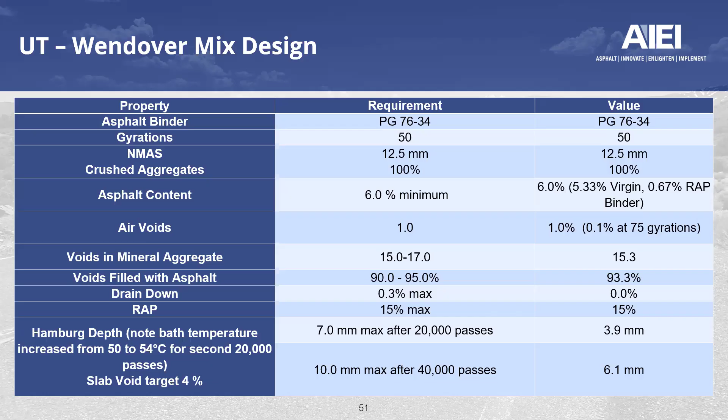Fair enough. The next question showed up on slide 68, which shows the PG 76 minus 34, formerly called PG 64E minus 34.

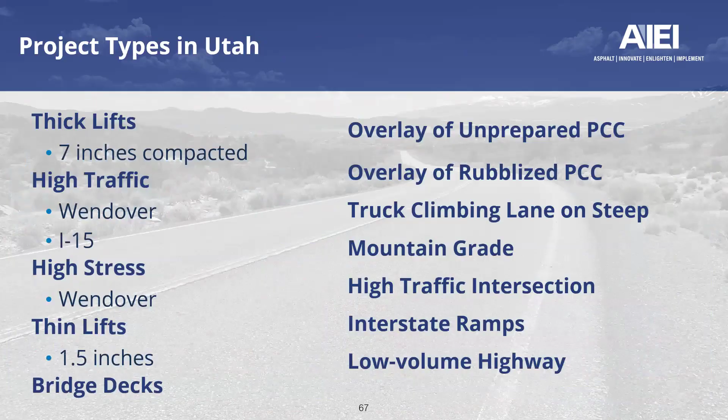Oh, I think... yeah, go ahead, Tim. I'm sorry, go ahead, I was just going to repeat the question.

Is PG 76 minus 34 formerly called PG 64E minus 34? No, I think the confusion arises because we started in Montana with an MSCR grade—we are an MSCR state, and our future projects will all be MSCR grades. There were issues getting the mix design to pass under the original Montana DOT spec with the contractor, so about two weeks prior to paving, there was a switch to the Utah spec, which included a PG 7634, an M320 binder. So the shift was made to a straight PG grade versus an MSCR grade, and that may be where the confusion is arising.

Got it, okay, that's good for the clarification.

Now, staying on this slide, I'll skip to the next question that came in. Are all of these current and future projects being considered to use high polymer asphalt as a requirement to meet the spec of these projects? Yes. Very quick answer, very good.

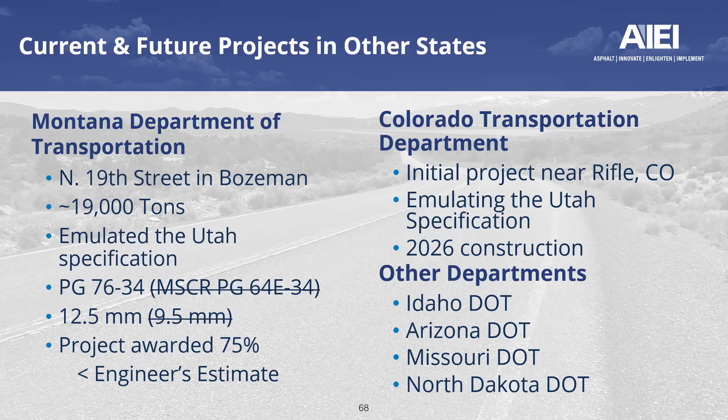Okay, fair enough. I skipped over a comment we'll go back to, relating to slide 42—I think Oklahoma has a similar example. In the UK, with overlaying severely cracked concrete, a 6.5% SBS binder was used in a SAMI and an SMA surface course, and the solution was very cost effective compared to replacing the concrete, which has been out there 10 years with no signs of distress. I thought this was a nice comment relating to the Oklahoma experience, and I don't know if you have any comments to add.

Thank him for the comments, I appreciate the information. Maybe the only thing to add on Oklahoma—going back to the history—the first section on the NCAT test track had a base layer employing an Oklahoma mix, emulating the rich intermediate layer that Oklahoma was very pleased with. The year after, they decided to pave about 2 miles on I-40 using the rich intermediate layer, and they've seen fantastic performance until now. We've also looked at the tonnage and frequency of use of such mix for the state of Oklahoma.

Good, it's interesting to see how the performance in the UK and Oklahoma mirror each other, and both are very good. Next question relates to preventive maintenance schedules: if you're using a high polymer binder or mixtures, what would you say about your preventive maintenance schedule?

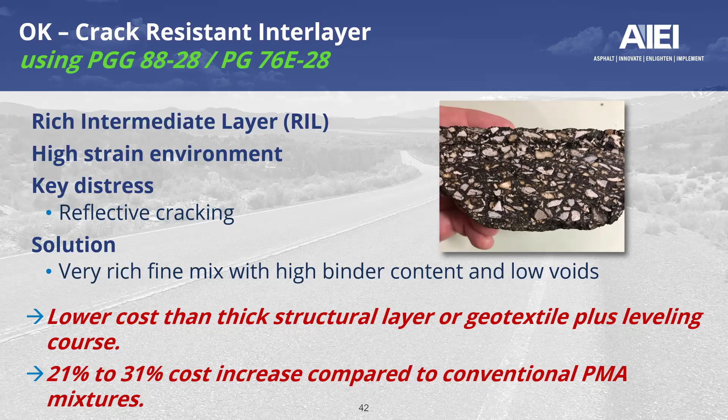I don't know if either of you might add anything to help out Alabama and Florida. The only thing I'd add is that with high polymer technology, there are two distinct ways of approaching the mix, whether it's open graded, dense graded, or even SMA. For example, Virginia DOT uses SMA with HP—they design their mix using the conventional method and then just do a binder swap, which gets them that extension in performance life. We've seen that in the case of Florida DOT with the open graded friction course, showing a significant extension in performance life. When it comes to high mod, it's a system—a combination of the enhanced properties of the binder being used, as well as different parameters for a given mix design. So it's a system coming from the aggregate and the binder together into the mix, and is not necessarily just a binder swap.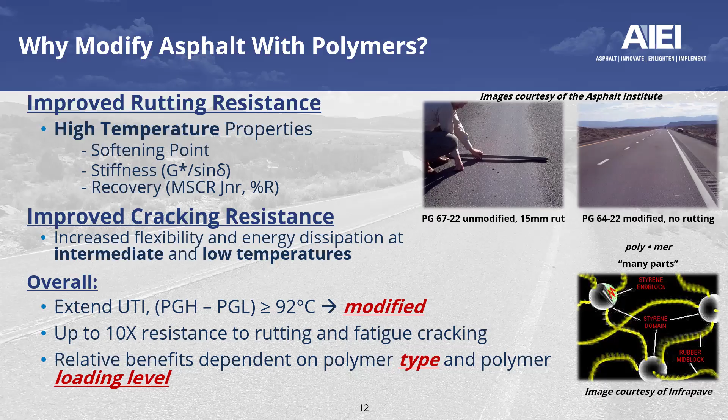Very good. And then slide 30, maybe we'll wrap up. We've got a couple binder questions here with our high polymer binder. Could the poker chip test provide a better means to characterize the strength of the polymer network? What are your thoughts if you're going to specify a high polymer binder?

If I want to start, thank you, Gary, for this question. I assume Gary Fitz asked the question. My experience with the poker chip is limited, so I'm going to pass on this question. But I would assume if it was able to pick up on performance and been useful for conventional polymer modified, I don't see why not for high polymer modification.

Dave, I'm not sure if you have anything to add on the poker chip. My experience with the poker chip might even be less than yours, Johnny. It's definitely an evolving test that is gaining attention. I'm just not expert enough to comment on it.

Fair enough. And as we look at this criteria, we see 90% minimum MSCR recovery appears to be very common. Is that based on performance? I mean, why wouldn't somebody say 75%? Any thoughts there?

I will say that it is a premium mix, and whether we're talking MSCR recovery or elastic recovery, 90 is the number that seems to rise to the surface, no pun intended. If your experience indicates that allowing 75% recovery still gets you the performance characteristics you're seeking, then I'm not going to argue against it. But thus far, 90 has been the number that's been settled upon, perhaps because we're conservative engineers, but the performance is indicating that's a good value.